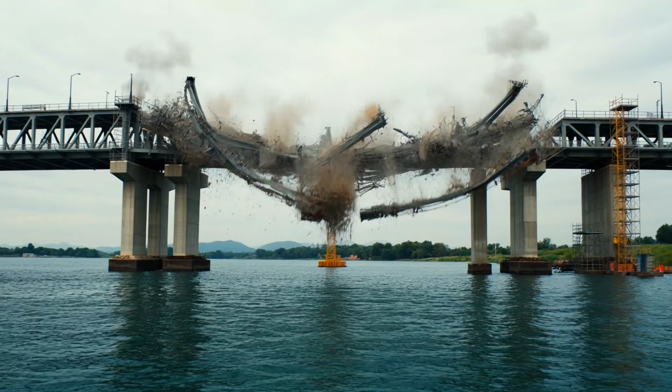But beneath the fanfare lay a deeply troubling truth. The project was underfunded, under-scrutinized, and overseen by a man who, by the time construction reached its most critical phase, had not visited the site in over 2 years. The stage was set, the dream was alive, and the clock was already ticking toward catastrophe.

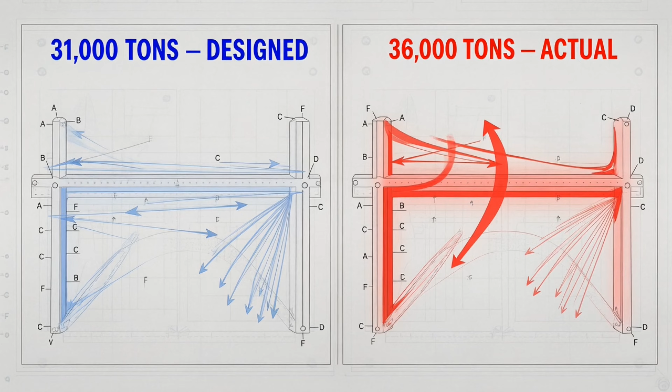Engineering is a discipline built on mathematics. Every beam, every rivet, every load calculation must be exact. In bridge engineering, there is no margin for wishful thinking. When the Quebec Bridge was first designed, the total estimated weight of the steel structure was calculated at 31,000 tons. This figure became the foundation of every structural decision. The size of the compression chords, the thickness of the plates, the number and spacing of rivets.

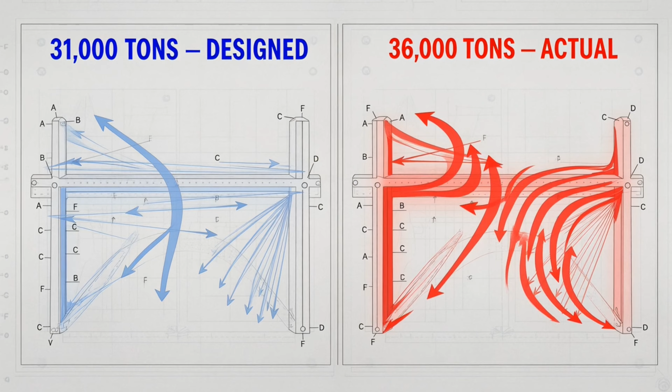But as construction progressed and the actual design was refined, that weight figure grew and grew until the true weight of the bridge was closer to 36,000 tons, nearly 5,000 tons heavier than the original calculation. This was not a rounding error. This was a catastrophic miscalculation that invalidated the structural integrity of the entire lower chord system, the very backbone of the bridge.

Norman McClure, a young engineer on site, noticed something alarming in the summer of 1907. The lower chords, massive compression members, were showing signs of bending. Slight, yes, but bending that had no business being there. He measured. He documented. He reported his findings up the chain of command. His warnings reached Theodore Cooper in New York. Cooper, instead of halting construction and ordering a full structural review, sent back a message: continue work while he investigated further. That decision would seal the fate of 86 men.

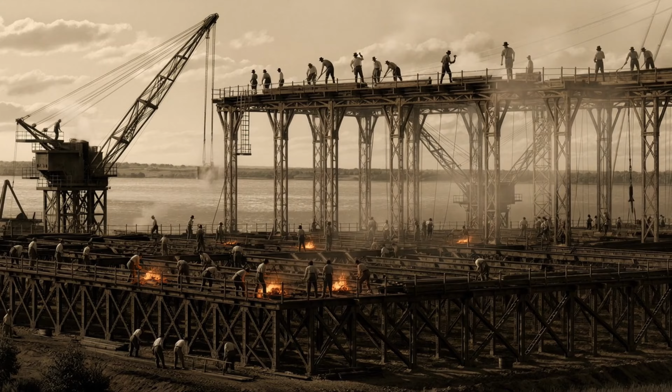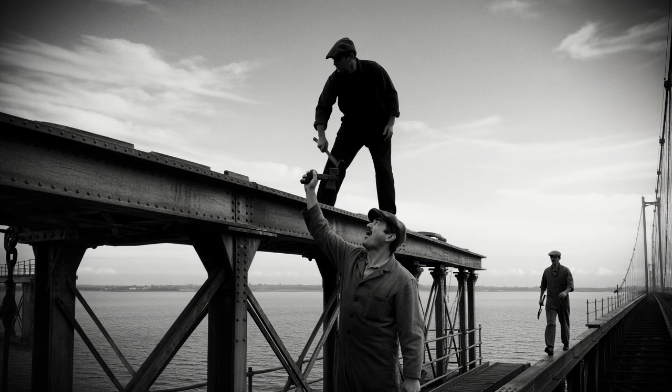Before we go further, we must speak about the men, because this is not merely a story of steel and mathematics. It is a story of human lives. The construction workforce of the Quebec Bridge was made up largely of Mohawk ironworkers from Kahnawake, a community near Montreal whose men have become legendary in the field of high steel construction. Fearless, skilled, and celebrated, they worked the highest and most dangerous parts of the structure with breathtaking competence.

There were also hundreds of French-Canadian laborers, immigrants, and young men who saw bridge work as a path to decent wages. They worked in the summer heat and autumn chill, climbing steel hundreds of feet above the river, trusting the calculations of engineers they would never meet. By late August 1907, the south arm of the cantilever was nearly complete. Over 9,000 tons of steel had been placed. The structure jutted out over the St. Lawrence like a metal finger reaching toward the opposite shore.

On the morning of August 29, 1907, approximately 86 workers were on or near the bridge. It was a Thursday, an ordinary workday. Some were new to the job. Some had worked the bridge for years. None of them knew that by 5:37 in the evening, everything would be gone.

At approximately 5:30 p.m. on August 29, 1907, workers on the South Shore heard cracking sounds. A witness described it as the sound of rifle shots, sharp, metallic, coming from somewhere deep in the structure. Foreman Benjamin Yenser had been watching the bent chord for days. He ordered workers off the bridge, but not all of them could get clear in time. At 5:37 p.m., the south arm of the Quebec Bridge catastrophically failed.

In a matter of seconds, over 9,000 tons of steel, the entire southern cantilever arm, buckled and plunged into the St. Lawrence River. The collapse was not gradual. It was instantaneous. Survivors described a single tremendous groan of metal, and then silence, save for the hiss of water and the cries of the wounded. Of the 86 workers on or near the bridge, 75 died. The river swallowed most of them beneath the twisted wreckage. Rescue operations recovered few bodies.

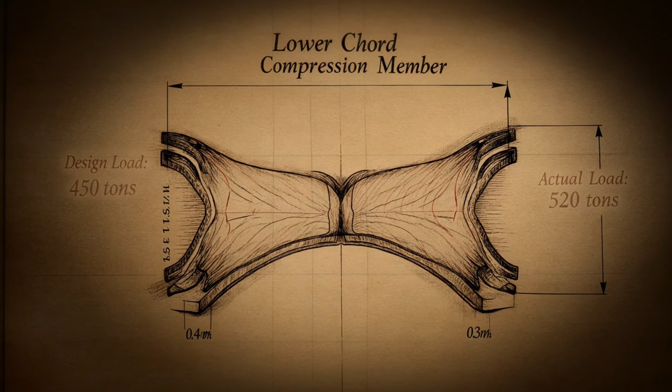A royal commission of inquiry was convened. Engineers, politicians, and survivors were called to testify. The commission's findings were damning and remarkably clear. The collapse was caused by the failure of the lower chord compression members, the very components that Norman McClure had flagged as bending just weeks before the disaster.

The design had been fundamentally flawed. The weight of the bridge had been significantly underestimated. The steel used for the compression chords was inadequate for the actual loads imposed upon them. Theodore Cooper, the commission found, bore significant responsibility. He had not visited the site since 1903. He had dismissed the signs of distress reported by his own field engineer. He had ordered work to continue when he should have ordered a halt.

The Phoenix Bridge Company, the fabricators and contractors, was also found negligent for proceeding without adequate verification of the structural calculations. But there was no criminal prosecution. Cooper was censured professionally, his reputation destroyed, but he faced no legal consequences. He died in 1919, a broken man.

The inquiry also exposed systemic failures, inadequate government oversight, poor communication between engineers, and an industry culture that prioritized speed and cost over safety verification. These findings would echo through engineering education for decades, but they would not save the next group of workers on the Quebec Bridge. Canada did not abandon the Quebec Bridge.

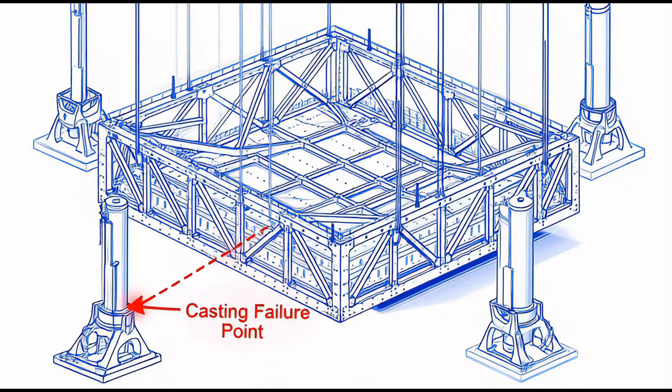After the 1907 disaster, the federal government took direct control of the project, hired new engineers, redesigned the structure, and recommenced construction in 1913. The new design was fundamentally different. The compression members were heavier, the calculations more rigorous, the oversight more thorough. The engineering profession had learned hard lessons, or so it believed.

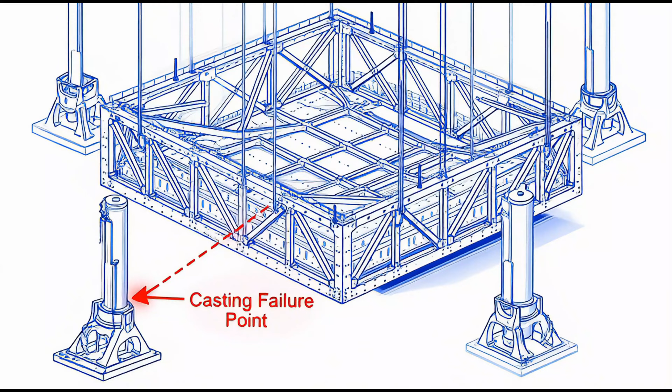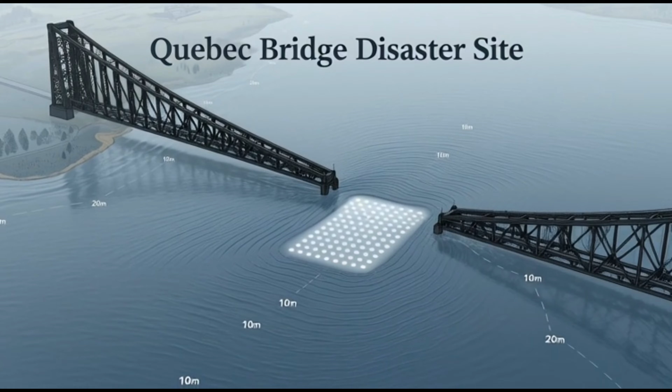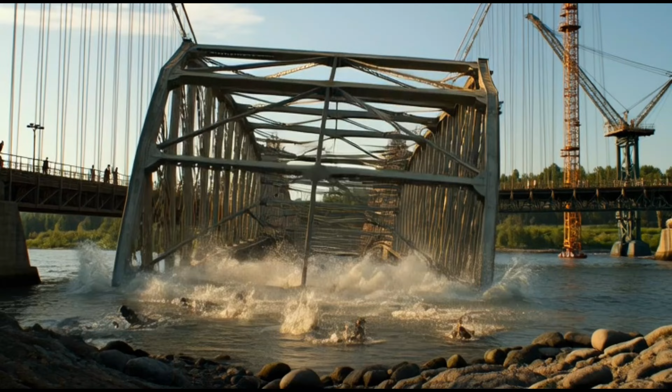At approximately 10:50 a.m., a casting, one of the four corner castings connecting the span to the lifting equipment, failed without warning. The suspended span dropped. It twisted, and then it fell into the St. Lawrence River, taking with it 13 workers who were riding the span during the lift. 13 more men were dead. The central span, the final piece of Canada's Great Bridge, was at the bottom of the river.

The inquiry this time was swift. The failure was traced to a defective casting, a single piece of metal that had cracked under the stress of the lift. The engineers who designed the lift mechanism had not accounted for the lateral forces that would be introduced during the raising operation. Once again, a miscalculation. Once again, lives lost. Once again, the St. Lawrence had claimed its toll.

A new central span was fabricated. New castings were designed and tested with far greater rigor. New procedures for the lift were developed, reviewed, and reviewed again. On September 20th, 1917, a full 10 years after the first catastrophic collapse, the new central span was successfully raised into position. The hydraulic jacks lifted it slowly, steadily, until the steel clicked into its bearings on the cantilever arms.

Workers cheered. Newspapers proclaimed victory. After 30 years of effort, two disasters, and the deaths of 88 men, the Quebec Bridge was complete. The bridge opened to rail traffic on December 3, 1917. Road traffic followed in 1929. It stands to this day the longest cantilever bridge in the world, spanning 1,801 feet between its main piers.

And if you drive across it today, you cross the St. Lawrence in minutes on a bridge that carries the weight not just of steel and concrete, but of nearly a century of human ambition, failure, sacrifice, and ultimately, triumph.

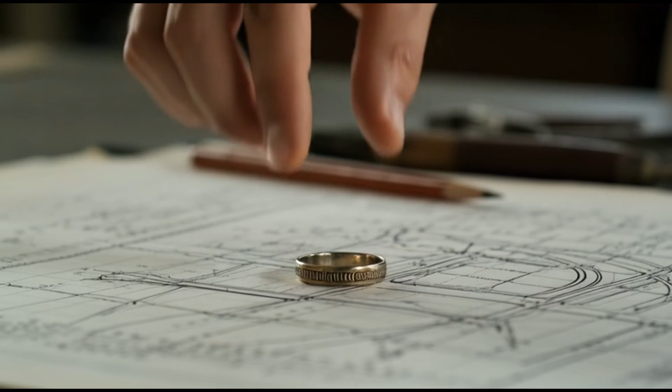The Quebec Bridge did not just teach engineers to calculate better. It taught them that their calculations carry human consequence. That confidence without verification is not engineering. It is gambling with other people's lives. That lesson is the truest legacy of Canada's greatest engineering failure, and its most enduring monument.